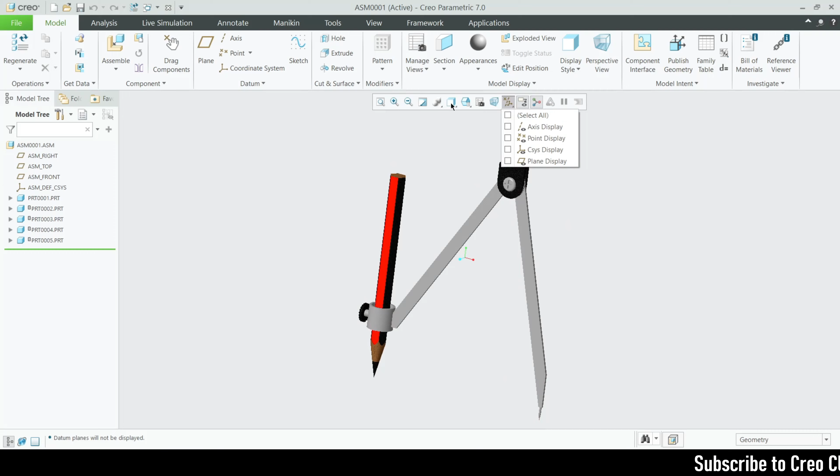So let's open. First of all, let me open this assembly file so that you can have a view on what is inside of this. Shading with reflections. So you can see here, this is the part that I have done, and whatever the detailing here, this pencil is fully just for my reference. This is for tightening the pencil, and here we have nut and bolt.

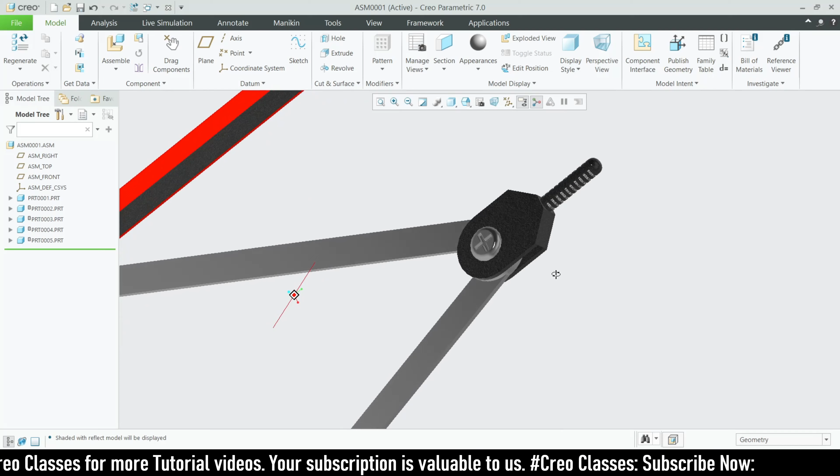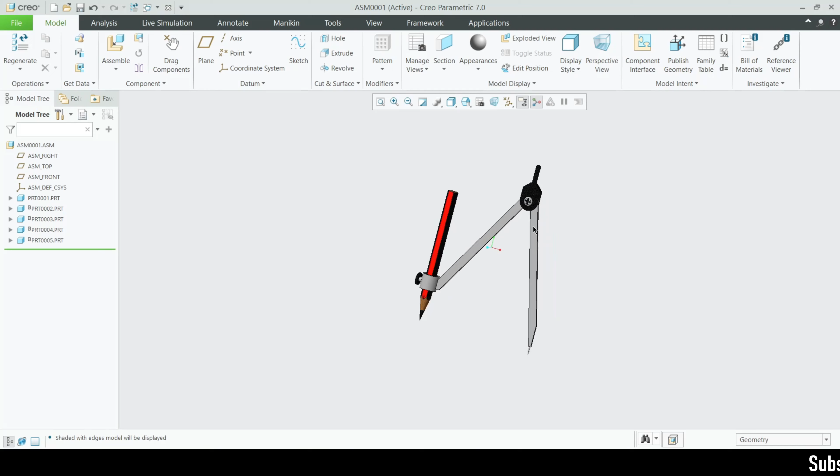Here you can see I just want to give some different color for this. That's fine. And when I go for shading with edges, you can see all these things are separate parts. I just assembled all of them. I'll show you how I did this. So first of all, let me open this part 1.

So this is the part 1 that I have done. Everything that I have used in this video is based on this dimension. Let me zoom in. I just downloaded this drawing from some website. You can see here, like StudyCADCAM.

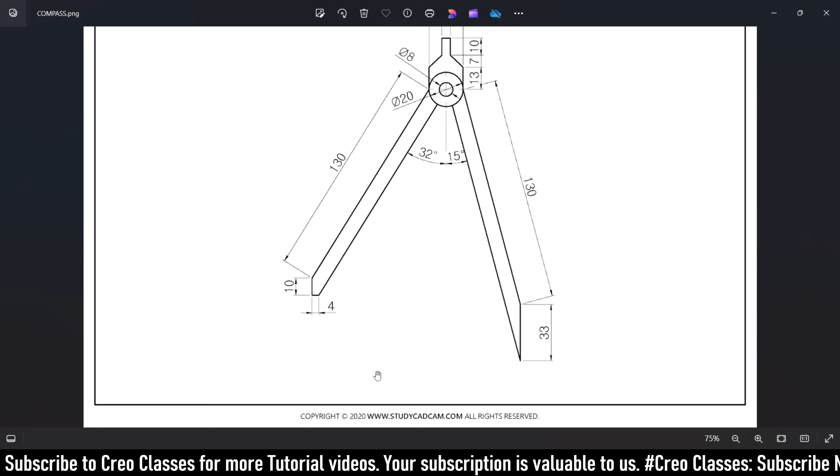I followed all these dimensions, and apart from this, some additional things like the pencil holder and pencil tightener, including the pencil, are my own dimensions. So let's close this. I'll show you how I did this.

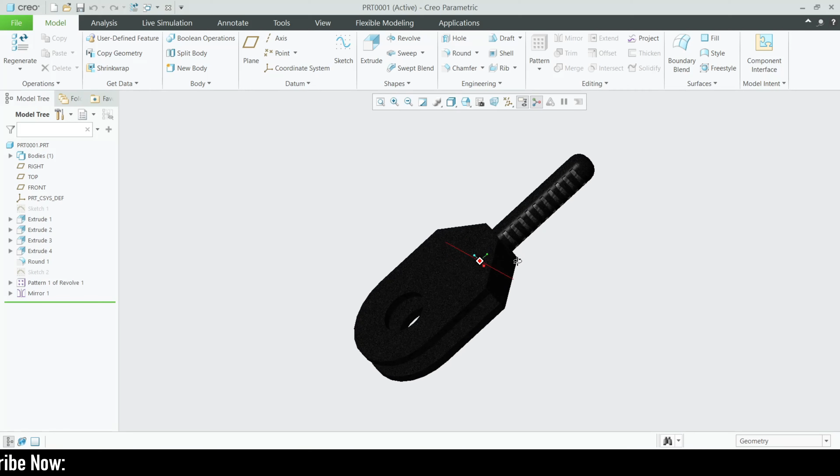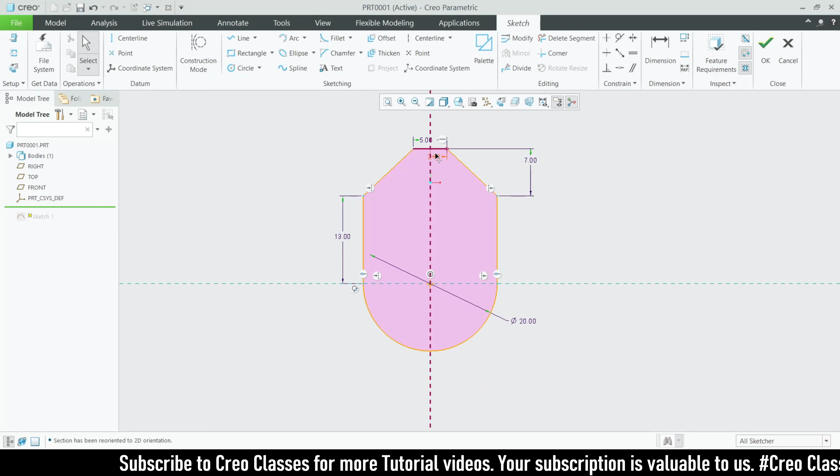So first of all, my first sketch is this profile. I just drew a full circle with a diameter of 20 and deleted half of the circle, and from the midpoint to the top at a distance of 13, and from here to the top at a distance of 7, I drew a line of 5, equally spaced on both sides, 2.5, and we can draw a straight line, right?

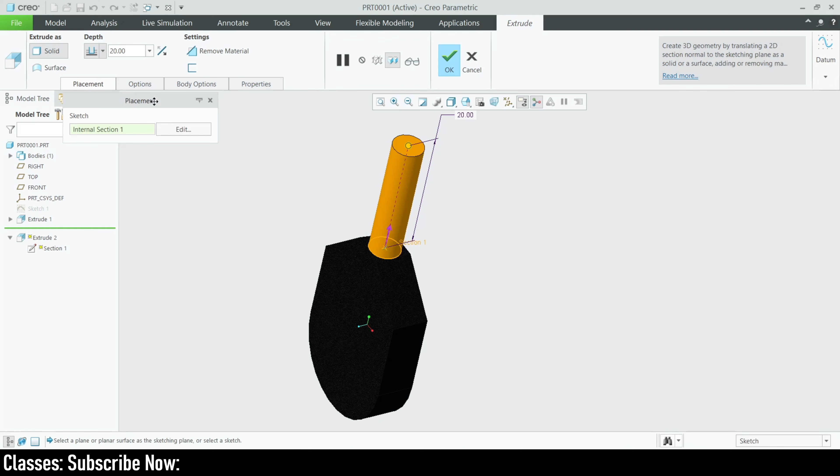Then let's go for the extrude, and here I extruded this to a length of 6 on both sides. Let's close this, and then my second extrude is this one. For this, I drew a circle on the top face with a diameter of 5, and I extruded that to a length of 20.

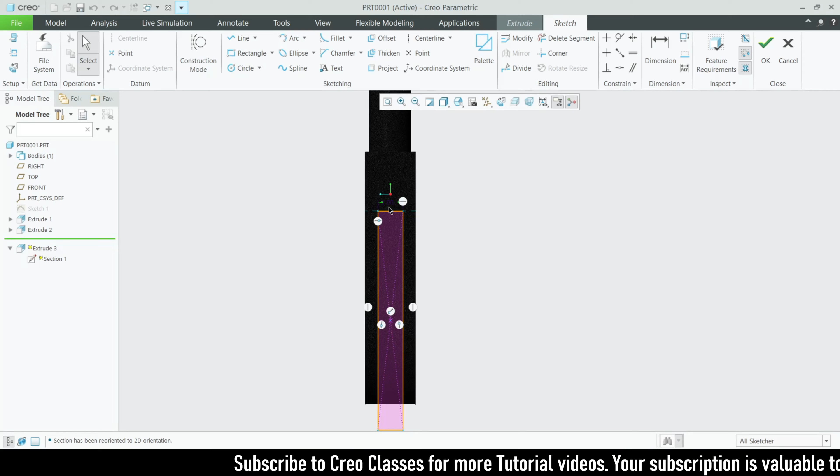The next extrude is this remove material feature for inside, for inserting this part, right? That placement you can see here: this is 3, and this is 1.5, gap 3, and for this height I used the reference plane here. Here you can see this is a flat surface, this is the end of the flat surface. After this there is a slanted surface, right?

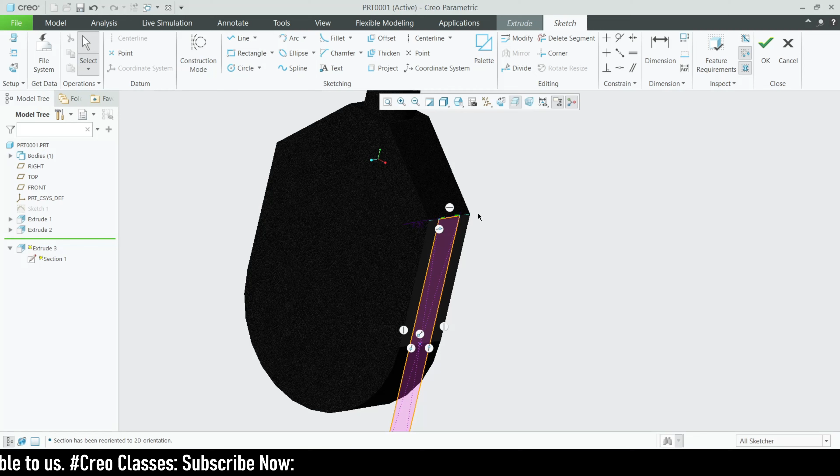So use this reference and draw a rectangle up to this mark. You can draw with your own reference, it should be bigger than this, right? And the distance is 3, 1.5 from here, 1.5 from here. Anyway, that will be a remove material feature, fully removing that, you can see here.

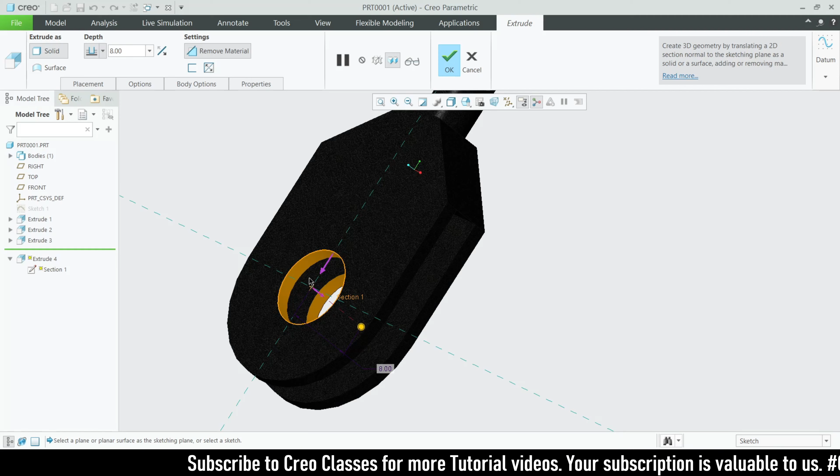After that, one more extrude is for removing the holes for inserting the bolt and nuts. That will be a diameter of 8. Let me show you. Use the midpoint which we used for this 20 diameter circle. That will be remove material, so we don't need to worry about that.

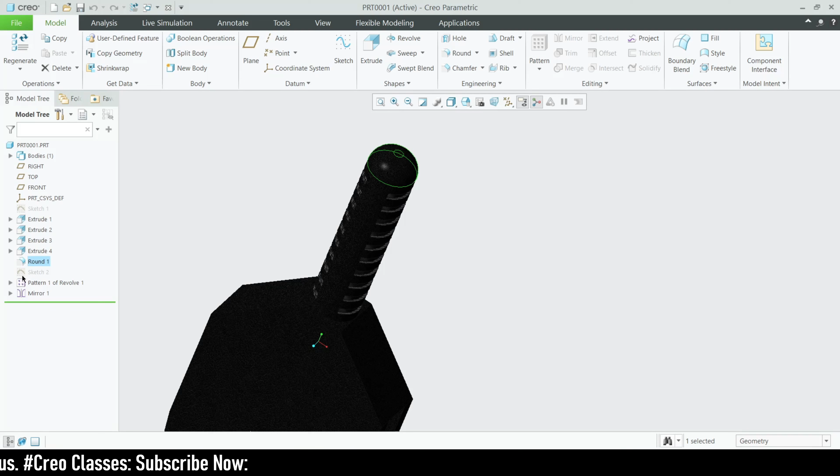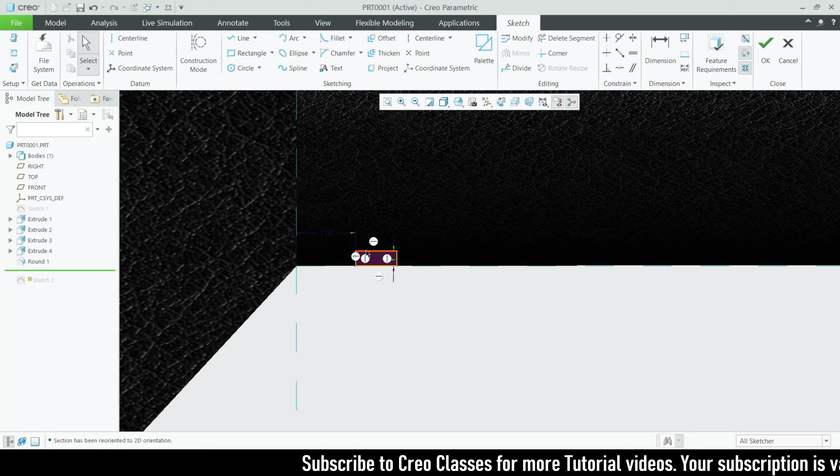The next one is the round feature. The round on the top will be 3, I think. Sorry, 2. Then after that round, let me go on with the sketch. This is for some designs, right? For that, use this flat surface reference. From that, 1 mm distance, and this will be 0.7 as a distance and a height of 0.25.

So just use a revolve tool. Let me show you how I've done this. First of all the degrees, I think 120. Use this as a symmetric revolve, enter 120, and use a remove material feature.

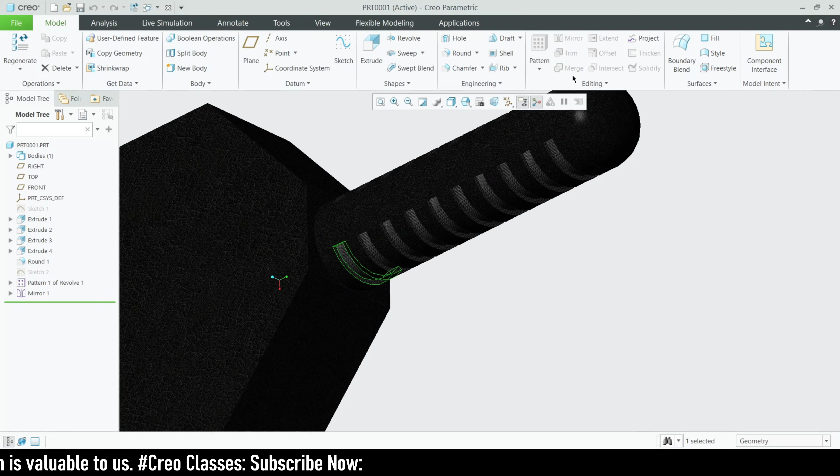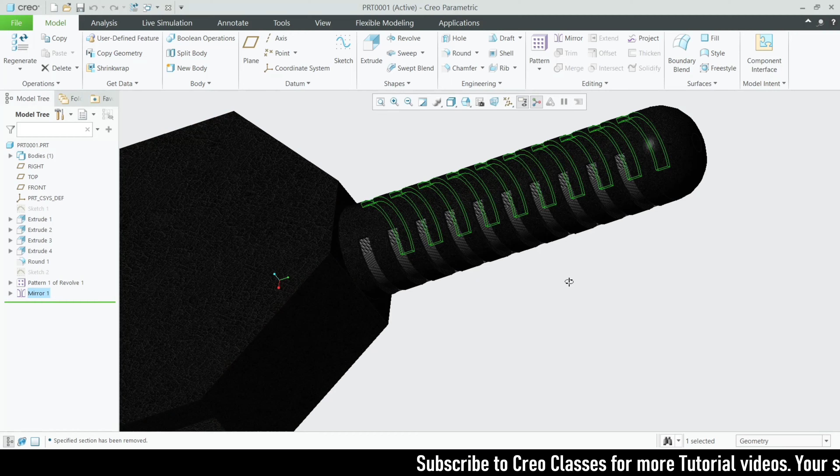Just close this, and let's go for the pattern. This will be a direction pattern. Once you go for the direction, select the axis, select this side direction, don't select the opposite direction, okay, this side, and enter number of members as 10 and the spacing as 1.70. Then your pattern will be created, and just mirror it on the other side. So this is the first part that I have done.

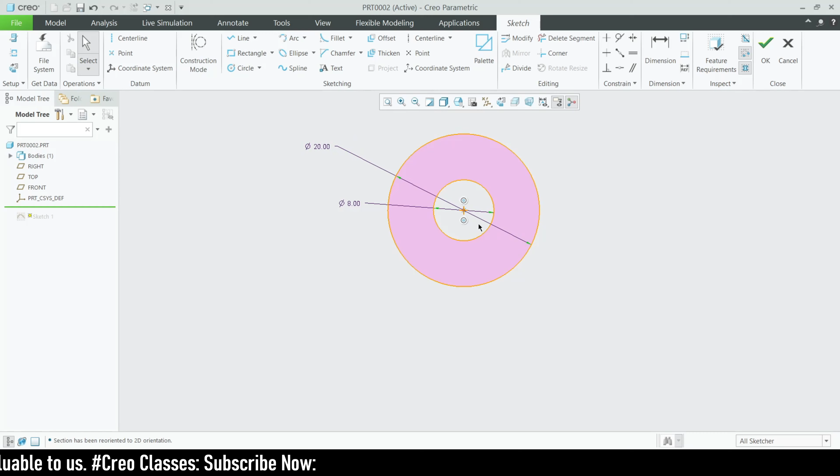So let me close this and let's open the second part. This will be part 2, right? So for part 2, let's go for the sketch. Draw two circles: the inner circle with a diameter of 8, the outer circle with 20 diameter, and let's extrude that at a distance of 1.5. Let me show you that also, 1.5.

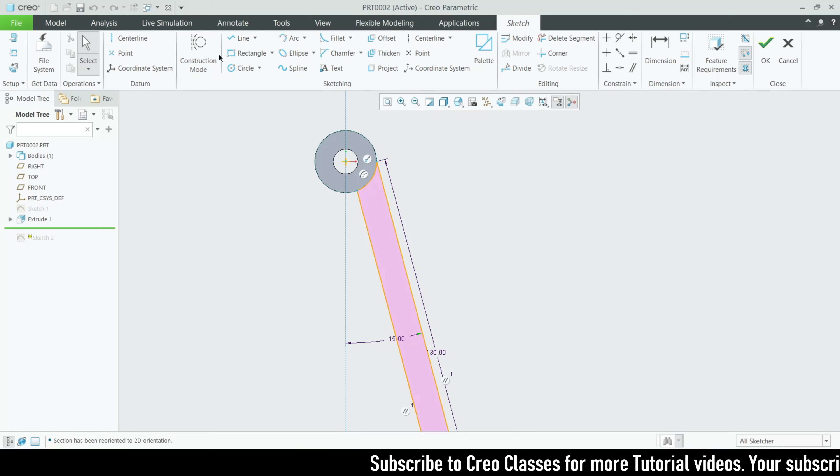And the next one is a sketch on the front plane. In that sketch, I think this will be somewhat complicated. From this midpoint of the circle, draw a line, and make sure that the angle is 15. Then go for the dimension, select this line, and click your mouse scroll button. Then you can adjust the dimension and adjust this length as 130.

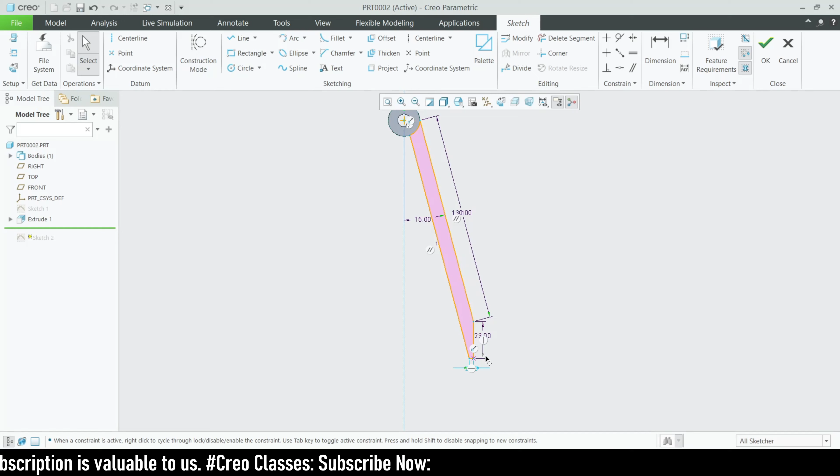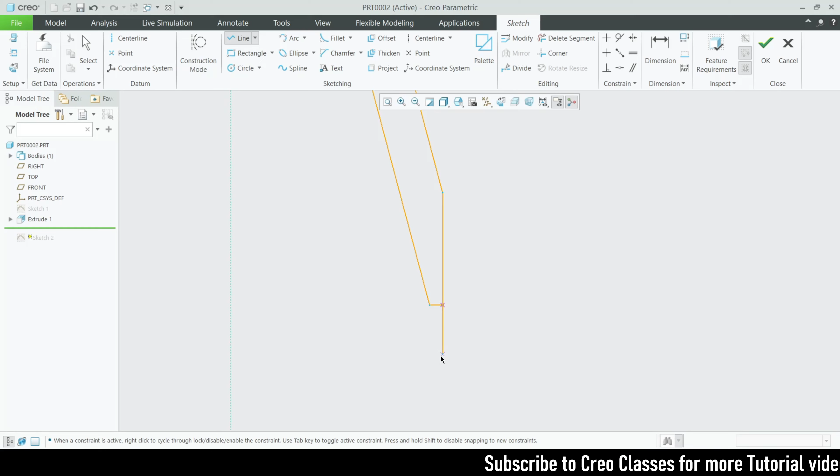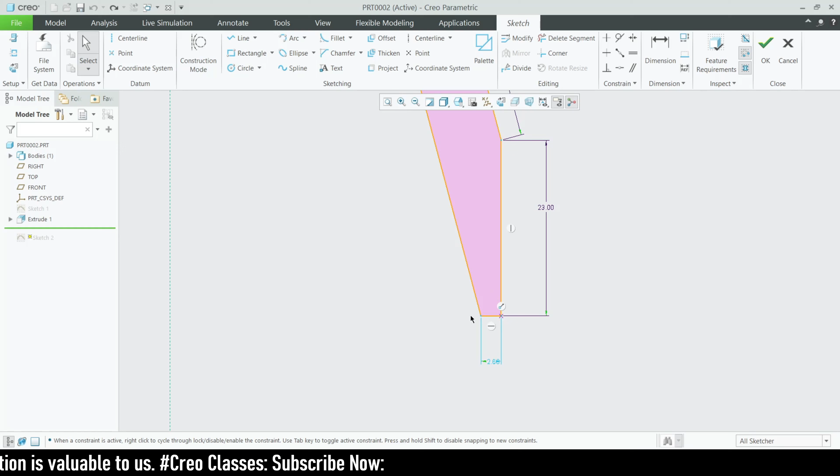After that, project this, and once you find this highlighted feature here, the part is done. Then from the bottom or from the top, place a point at the distance of 23, draw a straight line and remove the other features here. So this is how you can do this. And extrude this at the same distance of 1.5. Let me show you once again, you can see here, 1.5.

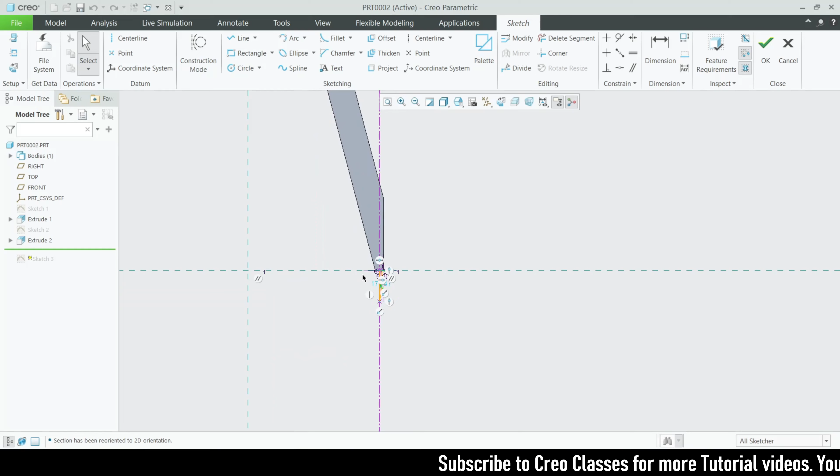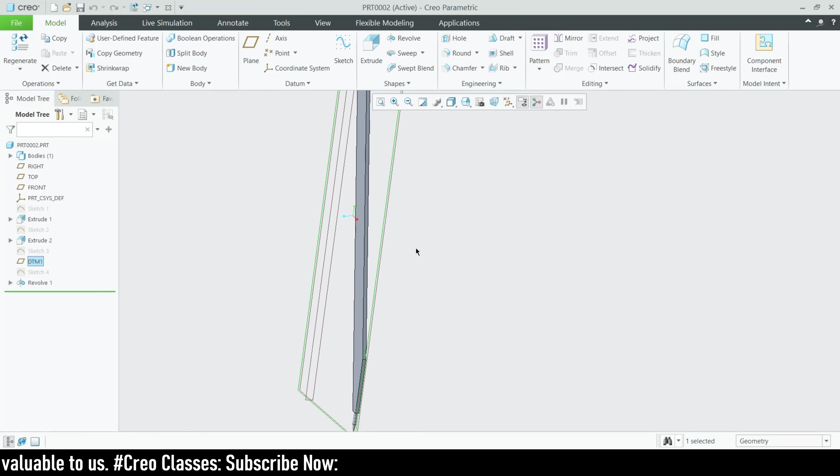So the next sketch is the bottom needle. For that I think you can't use the front plane; you need to create a separate plane. But before that, when you extrude this part, first extrude it symmetric on both sides. If you do this, you don't need to create a new plane. I'm creating a new plane because I extruded everything on a single side, from this plane on one side. Symmetric on both sides will be easier for you; you don't need one more plane.

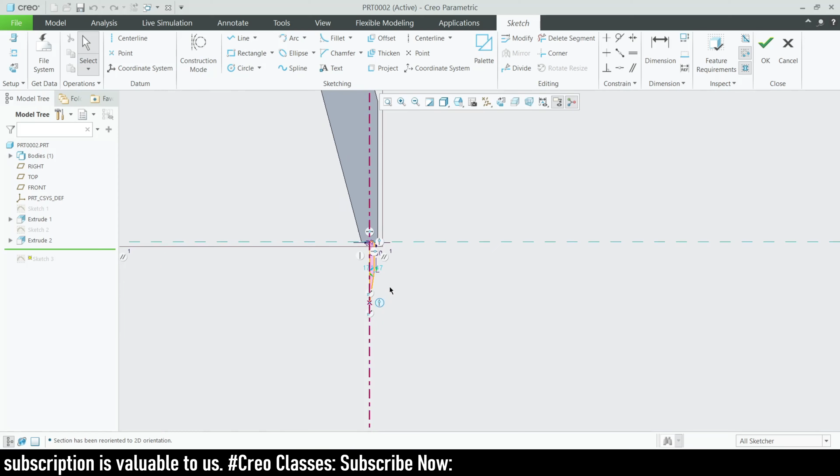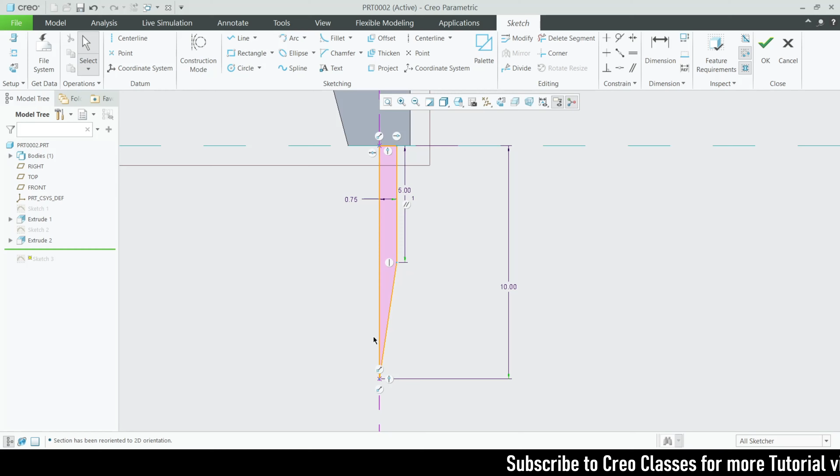For creating a plane at the middle, select the front plane at a distance of, sorry, not 2.5, 0.75. After creating that plane, go for the sketch. Place a point at the distance of 10, and place a point at the distance of 5, with a distance of 0.75 from the mid plane, draw a slanted line and close the sketch, draw a center line, and let's go for the revolve. So this is that.

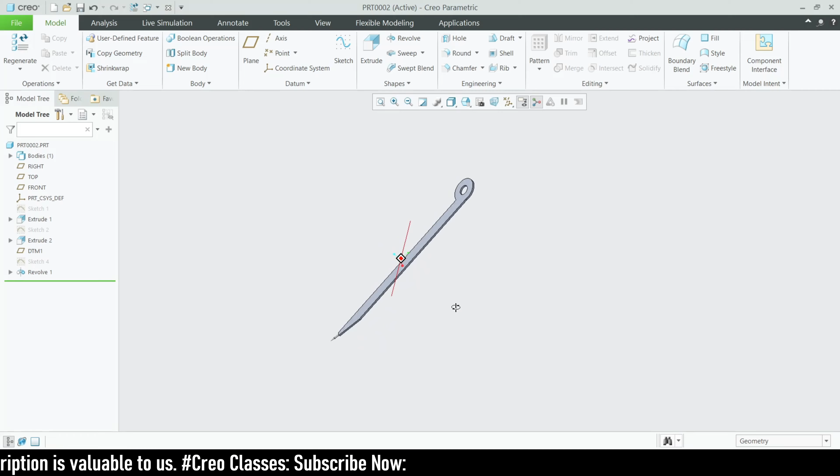I think this is not the sketch, I have to delete that. So then this is the revolve. Let's close that. So this is part 2, so let's close this and go for part 3. This part has some difficult things, let's see.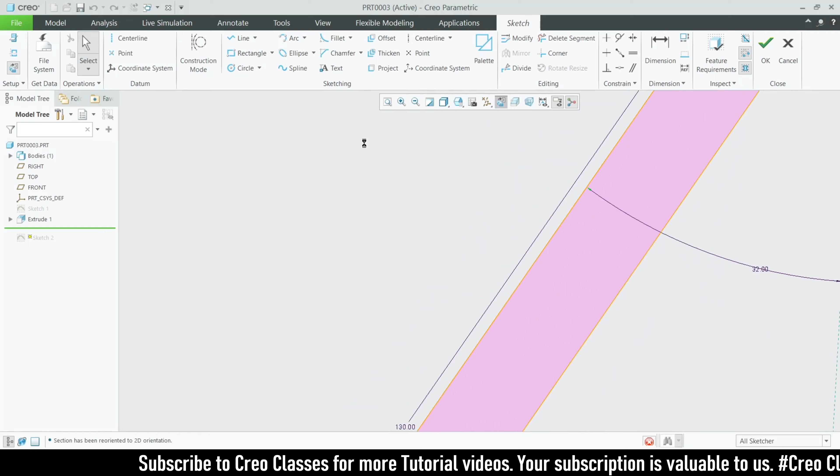The same sketch: the first one 8 and 20 diameter, and extrude that as 1.5. Use symmetric on both sides from the start, like I said before. And the next sketch on the front plane. This time, same, draw a slanted line from this midpoint, and this time the angle is not 15, it's 32, and the same length as 130, like the last one.

Then here draw a vertical line of 10 and a horizontal line of 4, and directly draw a parallel line from here towards this point, intersecting the circle. I think you got that, or else let me show you from this point. Let me delete this. First of all, how to do this.

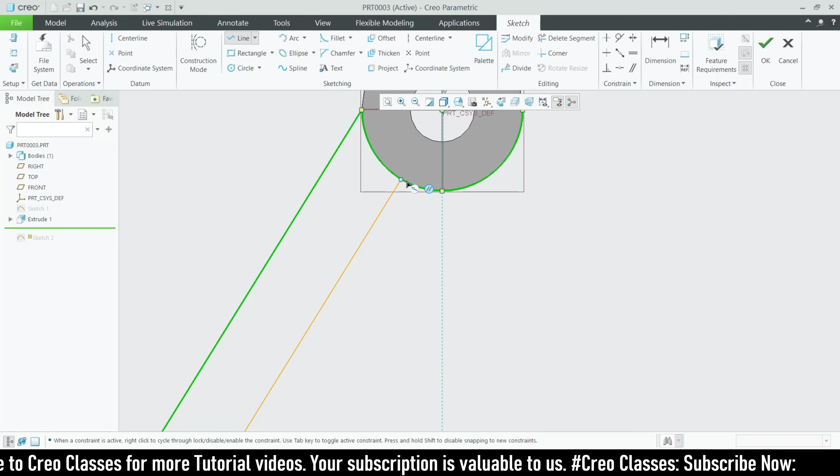So draw a line. Once you get near to this line, you can see the parallel symbol here, so it's parallel and intersecting the circle. After that, project the circle and delete these unwanted segments. So this is how you have to do that. Extrude this as 1.75, the same.

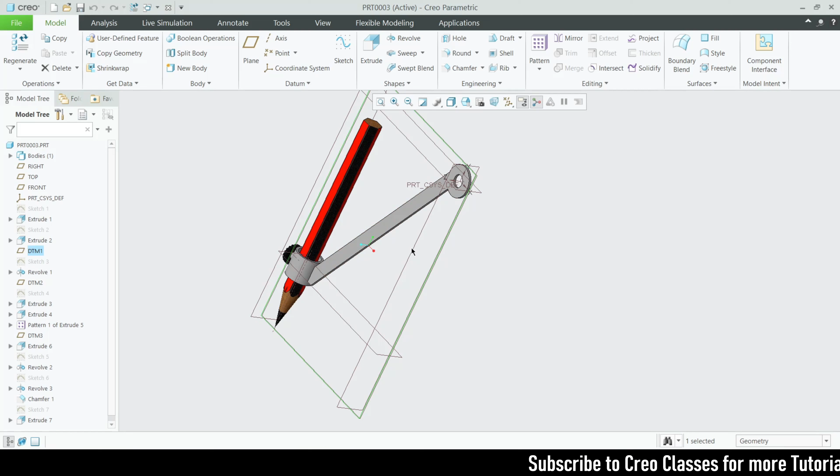And for this circular revolve, like I said before, if you are following the symmetric on both sides option, you don't need to create this new plane. I forgot to do that, so that's the reason I'm creating a new datum plane.

Okay, so I think there is no issue on that, but it'll be useful for time consumption.

So, like 0.75, create a new plane and sketch on the new plane here, intersecting this surface at a total height of 16, with the midpoint at 8 and 8, and offset to a value of 1.5. Draw a center line at a distance of 9 from this line.

Directly go for the revolve, and once you revolve this, this is the thing that you have right now. Good. So after the revolve, create a new plane.

So this plane you have to create it definitely. This is the right plane, right? Yeah, right plane. So from the right plane at the distance of 100, create a new plane, and on that new plane, let's go for the sketch.

Draw a circle of diameter 5 at the distance of 8. Extrude that up to the next surface. Either you can select the surface here.

Extrude. It's not a blind, select up to the selected surface. Select this surface.

Close that and sketch on the surface, the new part surface that we have created, and this diameter is 13. Extrude that at the distance of 2.

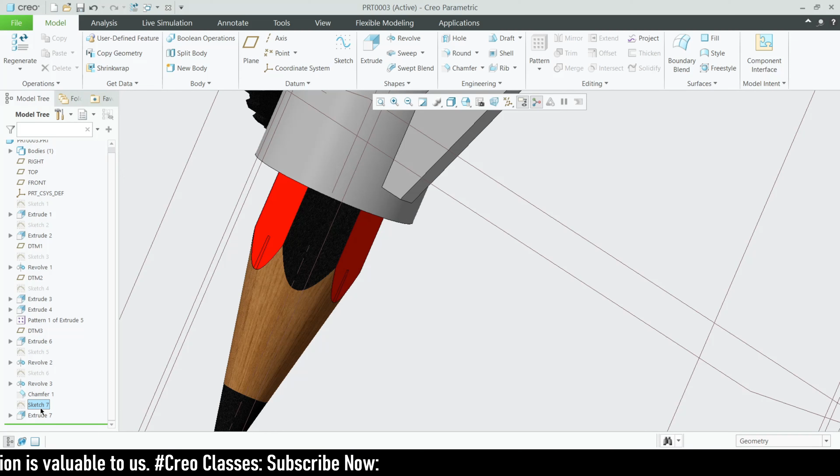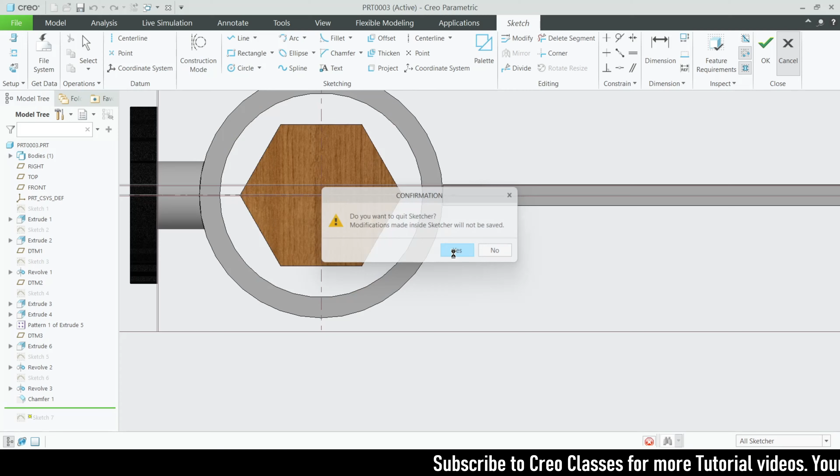So this is the thing, and the next sketch here, yeah, I can see the gap over here from the pencil to the surface. So for filling the gaps, just project this and draw a circle at this inner reference, then extrude that, that's all. The extrude length is 10 on both sides.

So this is part 3. Let's go for part 4. So this is bolt and nut.

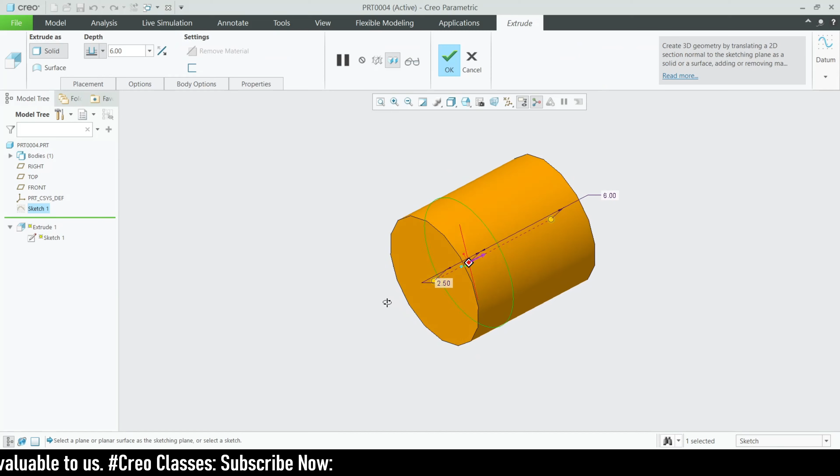Okay, so the first sketch is the circle at a diameter of 8, and let's extrude that at a distance of 6, blind 1, and side 2 blind is 2.5. And one more extrude on this surface, the circle of diameter 10, and extrude that at a distance of 2.

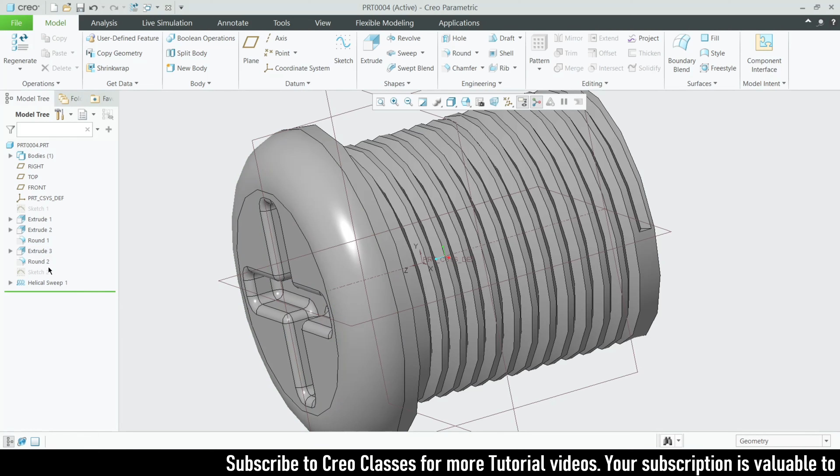And then I created a rounded feature here with a rounded radius of 1.50, and after that round, for this tightening feature, I created a hole for inserting screwdrivers for tightening the screw. So that's for my reference.

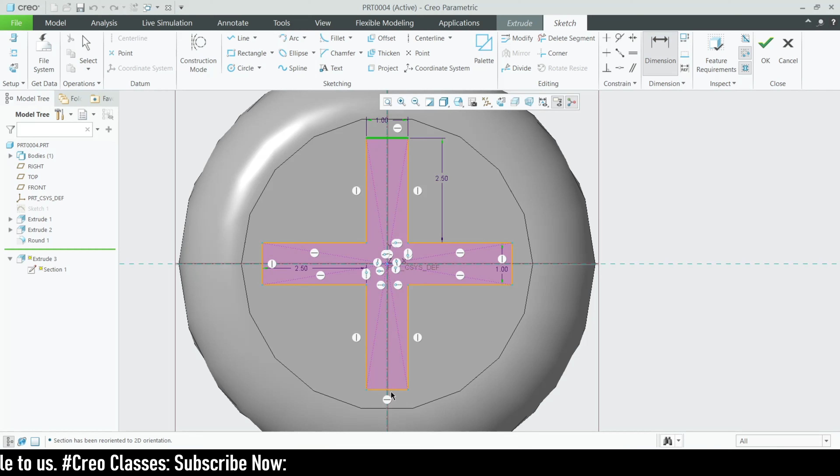So rectangle at a total height of 6 and the distance of 1. So then let's delete the unwanted segments and extrude that towards inside as a remove material feature of distance 1, and fully rounded features on all sides to 0.25.

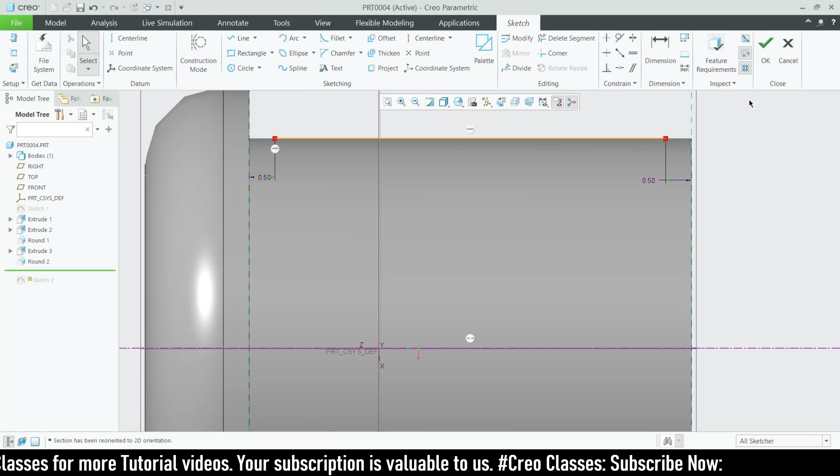So then the next sketch for helical sweep, so the sketch is like this. 0.5 distance here, 0.5 distance here, and draw a center line in here, and then let's go for the helical sweep.

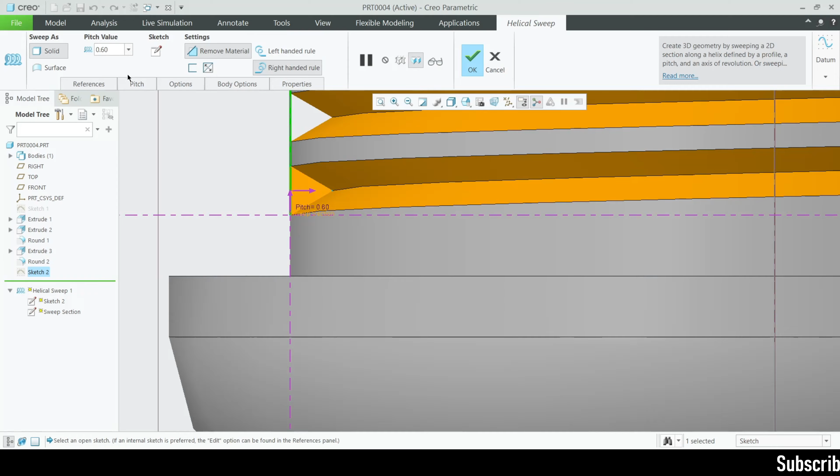And on the helical sweep, let me show the profile here. So this is the thread profile, 0.4 as equilateral triangle, on the top right of this x and y direction, axis. So then the pitch is 0.6. So this is the helical sweep that I have done here.

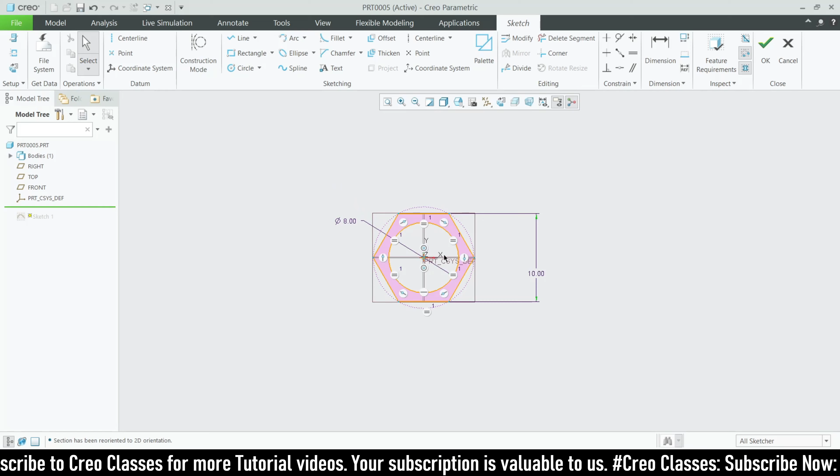So this is part 4, and the next thing is part 5. So part 5 is the same sketch of diameter 8 and a 6-sided hexagon at a height of 10. So 8 and 10, and extrude this at a distance of 2, both sides.

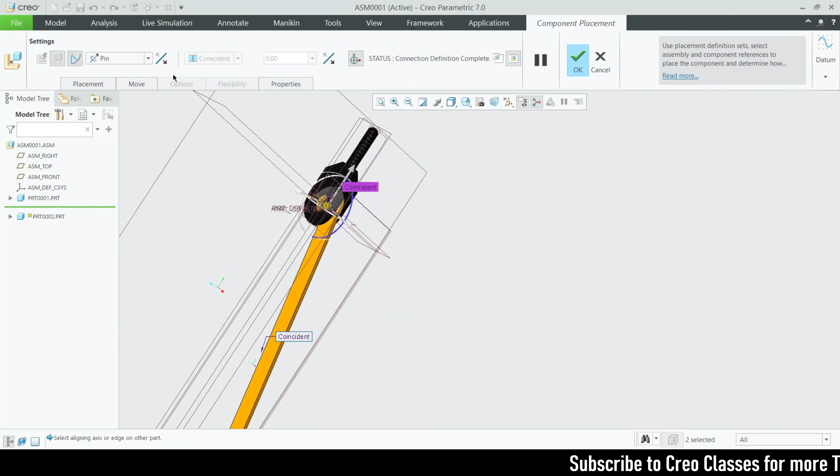So then that's all guys, this contains almost 5 parts. So then the assembly is really simple. Let's go for the edit. So place this as default as the first part, and then for the second part, directly use the pin mechanism, select this axis and select the assembly part axis, so it will be coincident, right?

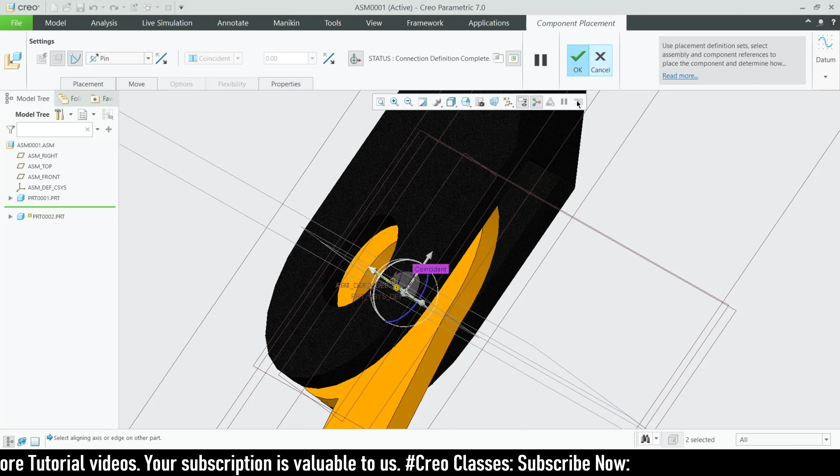So then for the face coincident, you don't want to select the plane, directly select the surface. Select this back surface and then select this inner black color surface, so then it will be coincident. And part 3, it's the same, right? Select both axes, and this time select the top surface of the part and the bottom surface of this assembly. It will be coincident. So this is a kind of easiest assembly, guys.

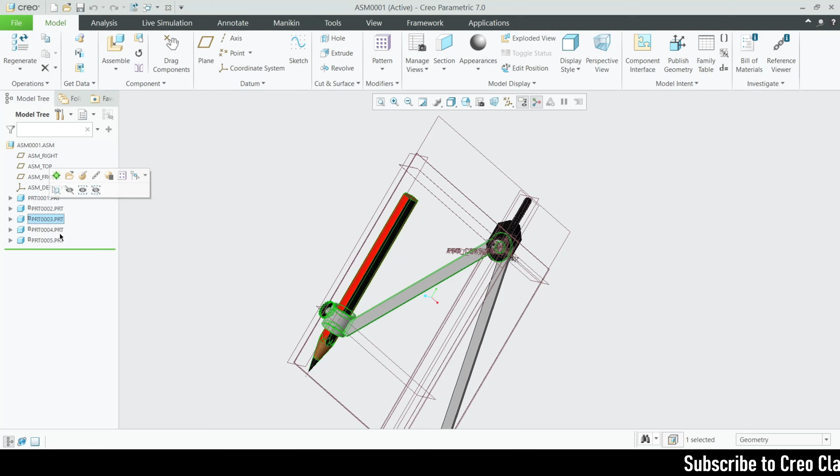So part 4, it will be the same axis, and this top surface, and the part inside surface, like we have this 10 diameter to extrude, right? So this top surface, you can see the line here, that's the surface. And then the 5th part, it will be the same. Select axis and face, that's all.

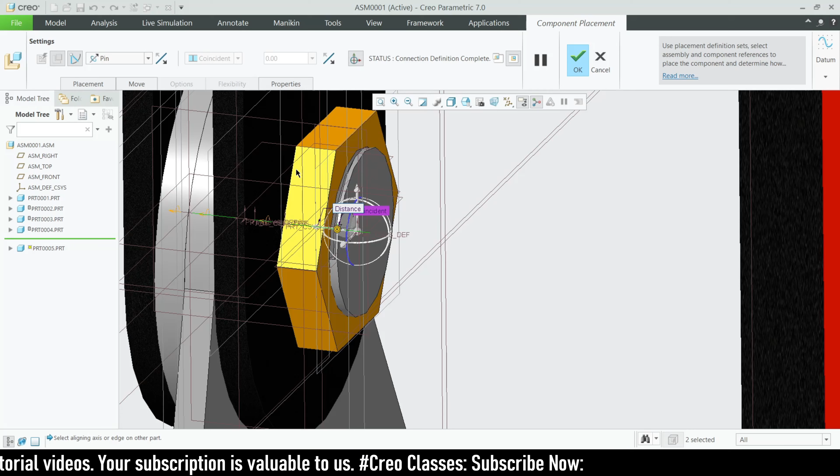So this is the part, and you can drag this and have access on all these things. I don't know why this part is highlighting here. Yeah, that's fine.

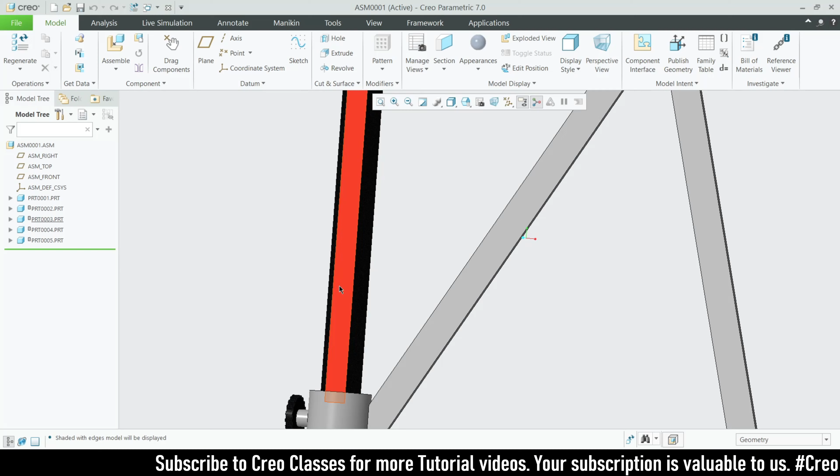So other than that, it's about appearances, right? So for the appearances, this is the misc black, and here this is painted red, and other than this is fully, I think it's aluminum.

Let's show you part 2. Yeah, so this is fully, what's this, standard aluminum polished. So use this, and other than that, all these things are similar to you, right? Like misc black and painted red.